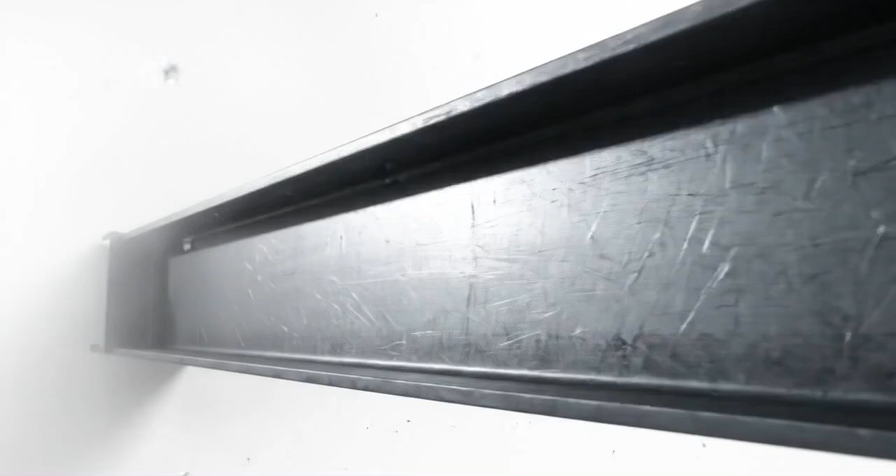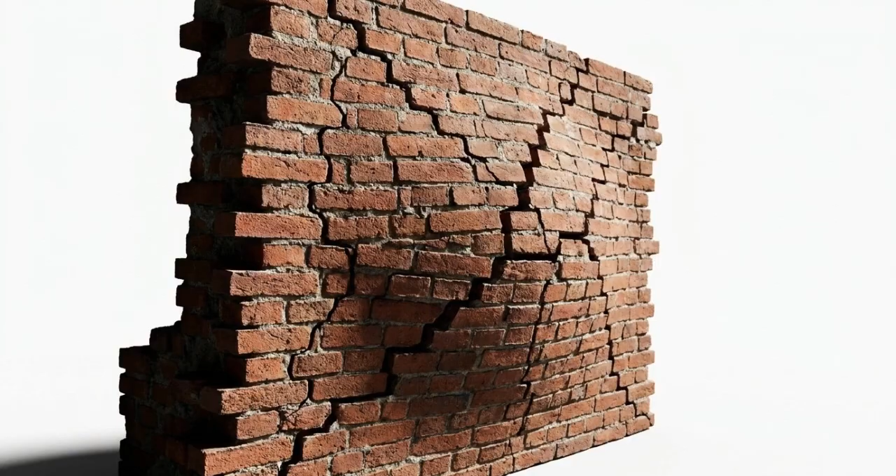Right now, beneath the floorboards and concrete of the buildings you walk past every day, a quiet standoff is happening. Every standing structure is in a permanent negotiation with gravity, fighting millions of pounds of downward force. When a foundation begins to rot, or a brick facade leans too far out, engineers have to step in. But fixing a building often means removing the very walls or footings that hold it up.

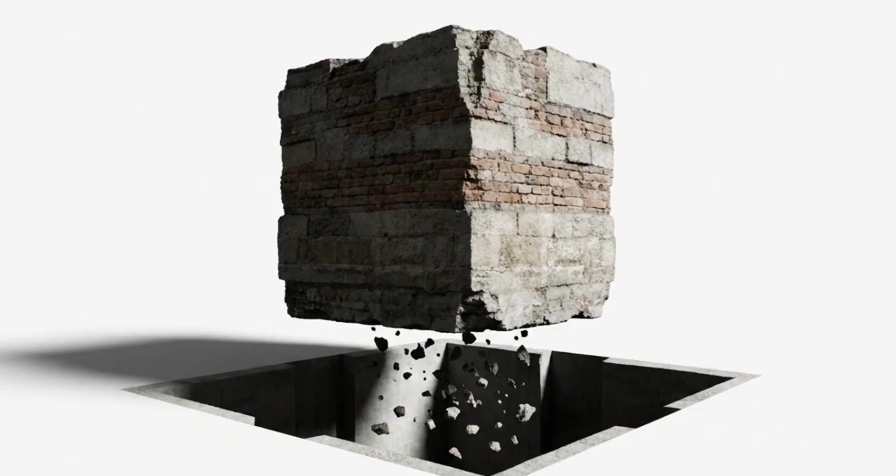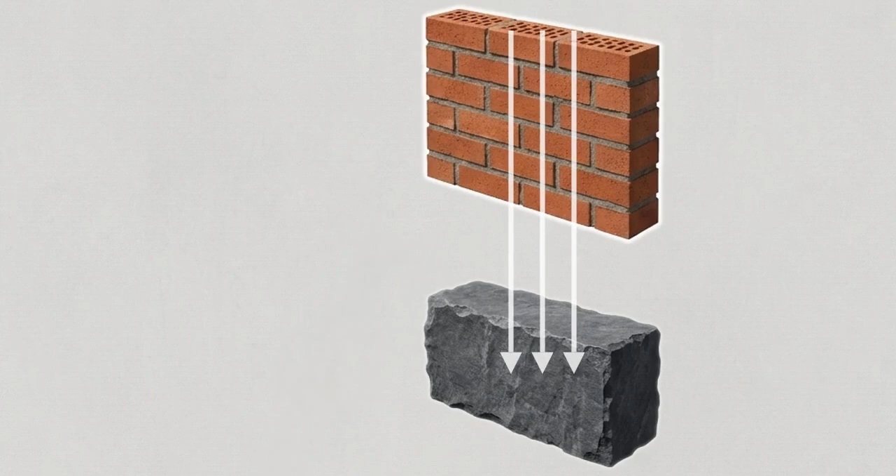The moment you cut away that support, gravity is no longer a passive force. It becomes an immediate threat. This triggers what engineers call the transfer moment. It's a temporary, highly volatile window of time where the massive weight of a structure must be perfectly caught, suspended, and moved to a new path before the old one is destroyed.

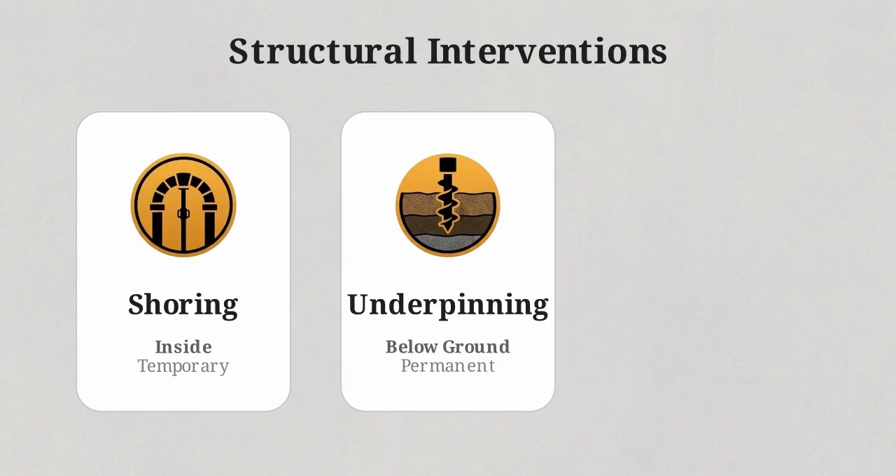To survive this window, crews rely on three distinct systems. Shoring handles the temporary support inside, underpinning manages the permanent rebuilding below ground, and scaffolding provides safe access on the outside. If these systems are deployed correctly, the building survives the transfer because it has been physically tricked. As far as the structure is concerned, nothing has changed.

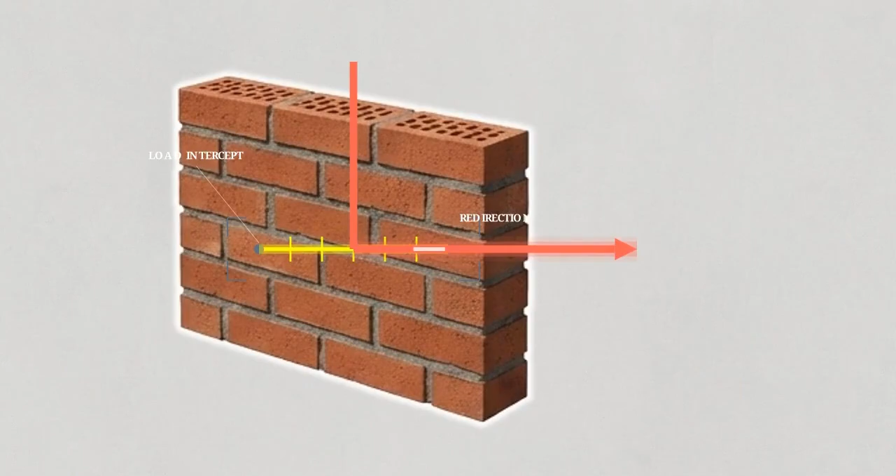When a masonry wall starts buckling outward, it can no longer carry the floors above it safely. The weight pushing down needs an entirely new path to the ground, fast. This diagram illustrates one solution, the raking shore. It catches the falling wall by redirecting its weight diagonally away from the compromised brickwork.

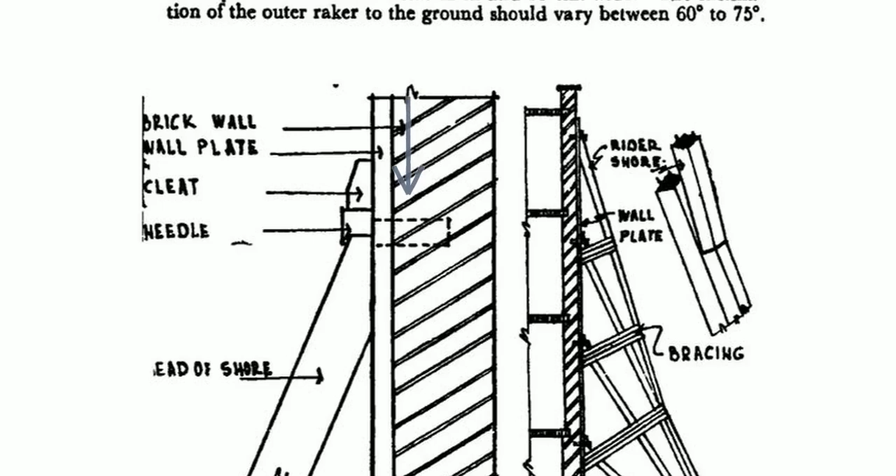To grip the masonry safely, the shore uses specific hardware. A wall plate is placed flush against the brick. Then, a timber needle is driven straight into the wall to bite into the structure, while cleats lock the heavy diagonal raker beam into place, catching the downward force.

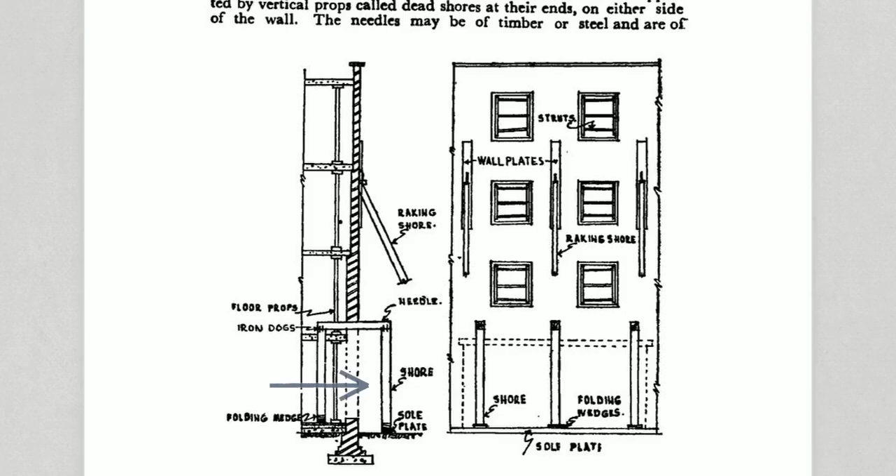Workers cut literal holes through the existing masonry and insert a thick, horizontal steel beam, also called a needle, straight through the wall. They then brace that needle with vertical props planted firmly on both sides. Once those props take the weight, crews can safely cut a massive opening out of the brickwork below. The entire upper half of the building remains suspended mid-air by the needles.

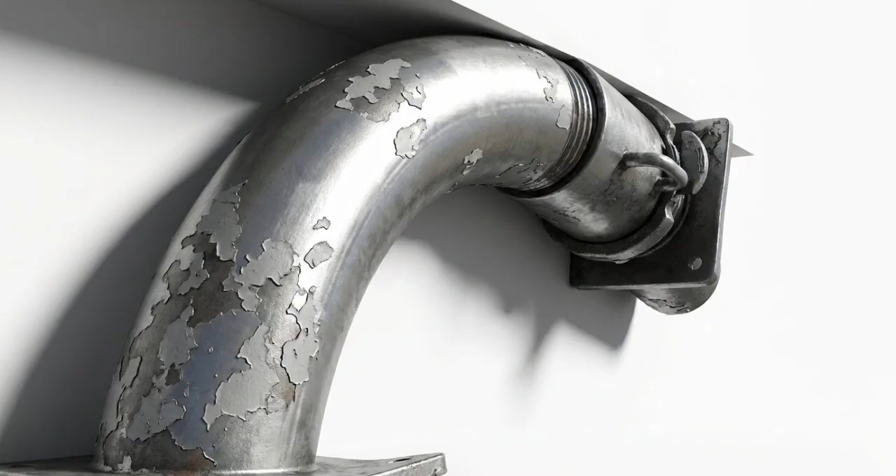Steel props and wooden needles can only hold a building for so long. Shoring is a stopgap. It buys the engineers the time they need to solve the real structural failure, which is usually buried in the dirt. Deep below street level, away from scaffolding and shoring, lies the decaying foundation. Fixing this requires working underneath a structure weighing thousands of tons.

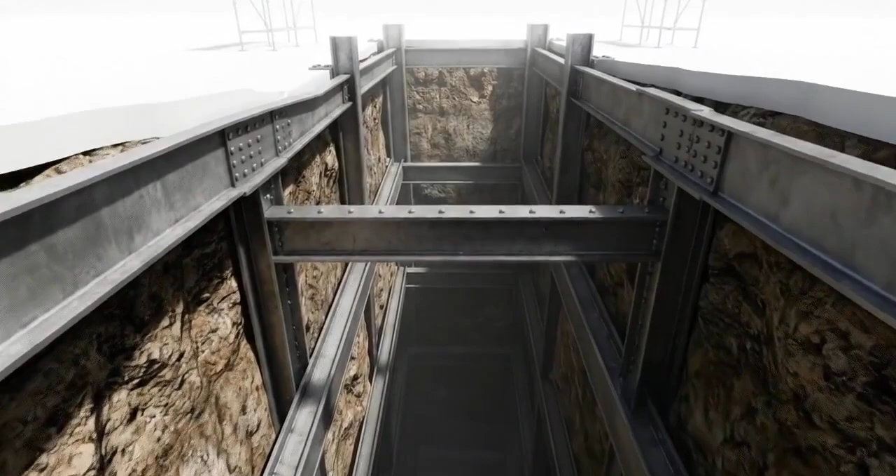There is one cardinal rule when repairing a foundation. You never excavate the whole trench at once. Doing so guarantees an immediate collapse. Instead, the dirt is dug out in a strict checkerboard sequence. In this diagram, Bay 1 is excavated and filled with wet concrete, while Bay 2 is left entirely untouched.

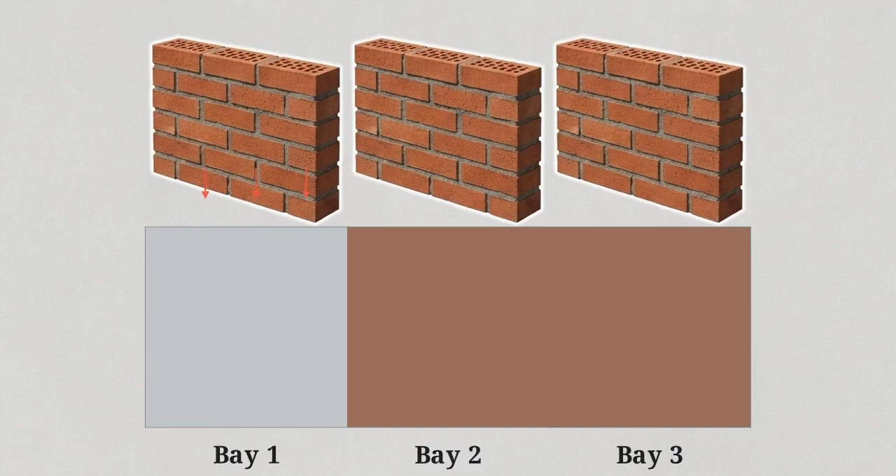That untouched section of earth is carrying the entire load of the building directly above it. It holds the line for days while the new concrete in the adjacent pit hardens, cures, and eventually safely hands the weight off. This cross-section illustrates how tight the margins are down here. Before the dirt is even moved, structural needles and heavy-duty jacks are wedged in to brace the old foundation.

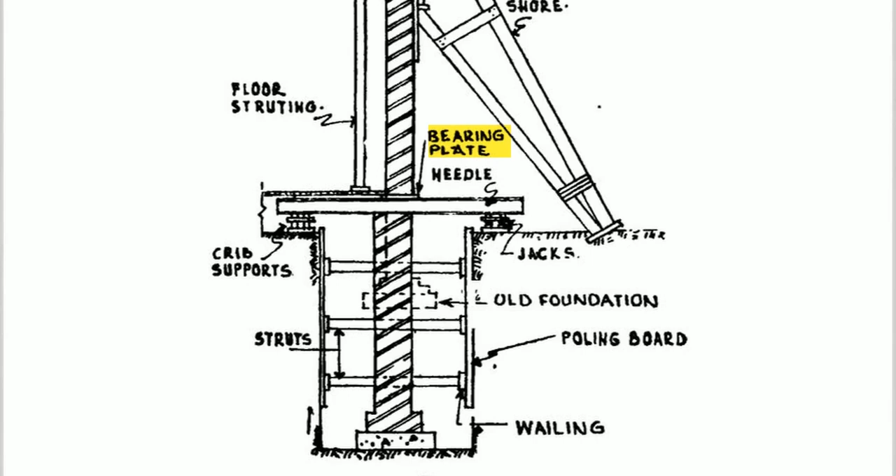Look closely at the wooden bearing plates inserted between the steel beams and the existing masonry. They distribute the massive point load of the jacks, preventing the historic brickwork from being crushed during the transfer. After weeks of this slow, methodical excavation, the building is standing on a massive concrete footing that did not exist when the project started, and the occupants inside never felt it happen.

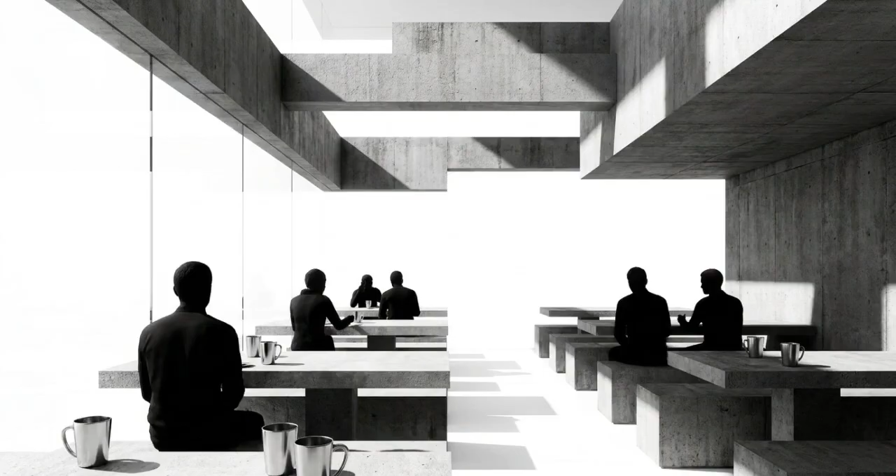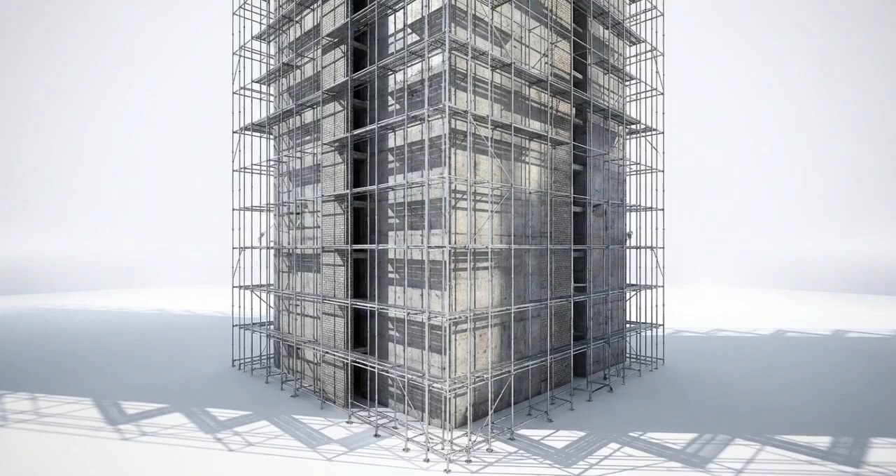Back above ground, managing the static weight of brick and steel is only half the math. Engineers also have to account for dynamic, unpredictable forces, the heavy materials, the wind, and the human workers. That requires scaffolding. A scaffold is a highly calculated temporary twin of the building itself, erected purely to let humans safely walk in the sky.

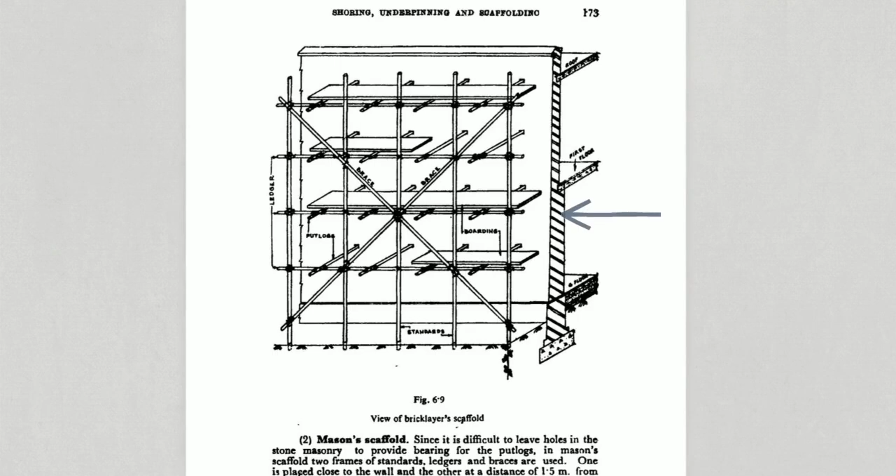This schematic of a bricklayer scaffold breaks down the anatomy. The vertical standards carry the weight of the workers straight down to the soil, while the horizontal ledgers hold those uprights securely apart. But to stop the whole grid from peeling away in the wind, it must physically tie back into the building. Notice the transverse putlogs on the right side of the diagram. They slot directly into the existing masonry, turning the building itself into an anchor.

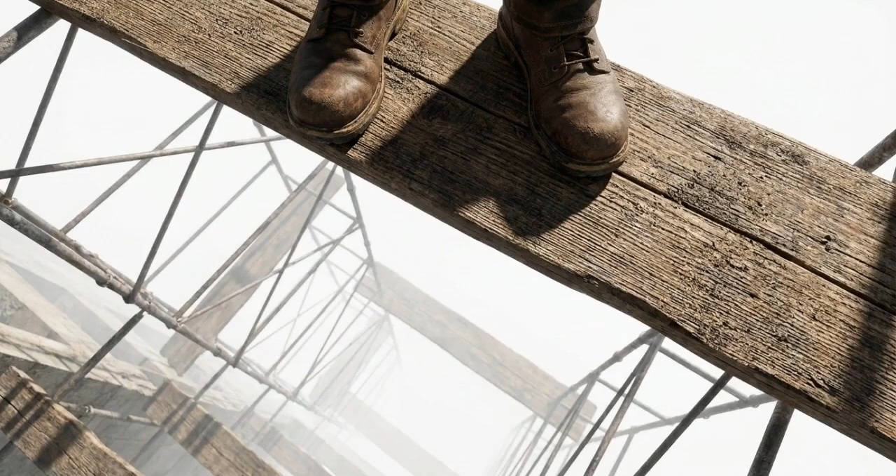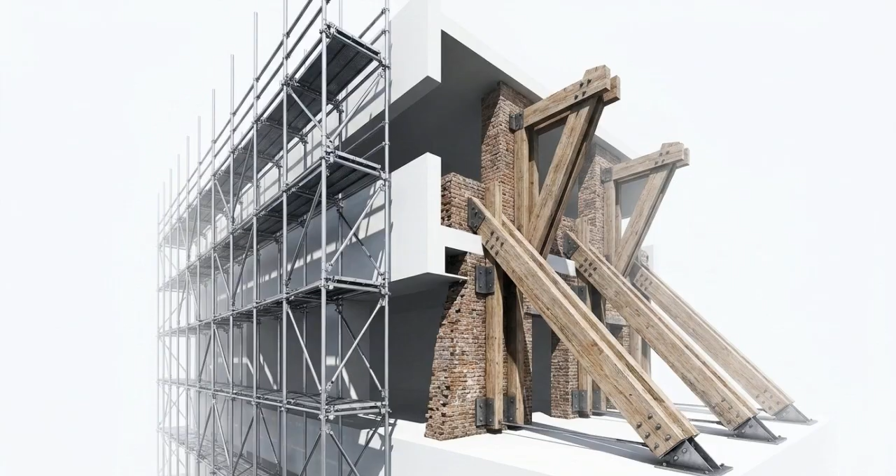Every pole, base plate, and tie is mapped out to handle maximum soil pressure and live load. It is an entirely separate structural skeleton, constructed just so workers can occupy a space that technically isn't there. When you step back, the true scale of a major retrofit comes into view. Scaffolding wraps the exterior, shoring props up the walls from the inside, and underpinning locks the foundation deep underground.

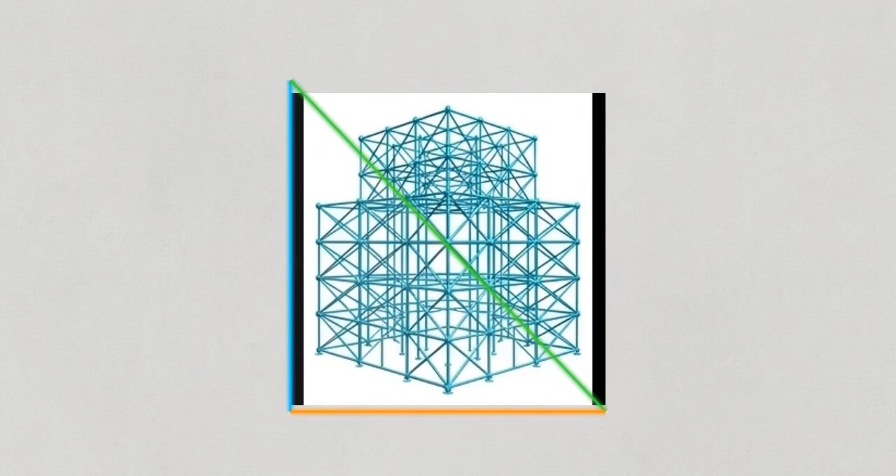These three systems are often installed by completely different crews, operating on separate schedules. Yet they must perfectly synchronize to create a rigid triangle of force that ensures the building remains perfectly still. Each individual system carries immense weight, but they are designed with a specific redundancy. They exist so that if one point is stressed, the others can safely absorb the shock.

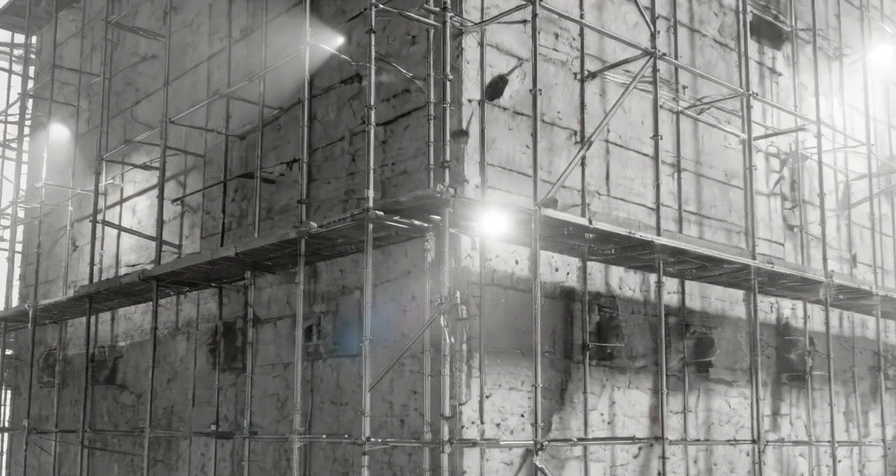Every historic structure, every retrofitted skyscraper you have ever walked into has at some point been quietly and deliberately made unsafe, just long enough for a team of engineers to trick gravity and rebuild the structure stronger than it was before.